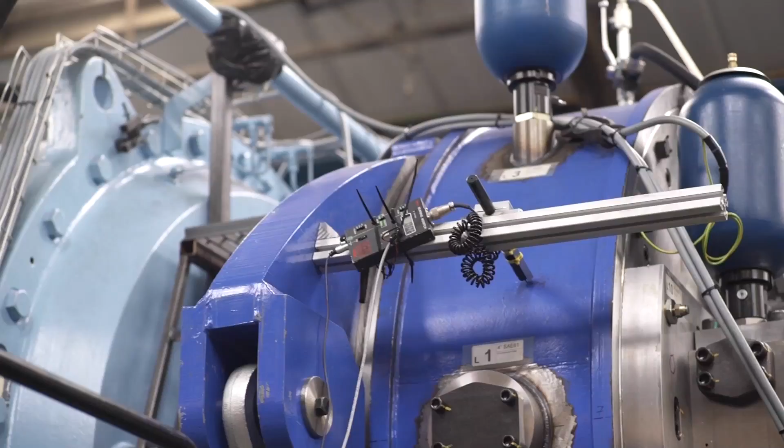Artemis Intelligent Power was a company we spun out of the University of Edinburgh in 1994. There were a lot of renewable energy projects on the go and no realistic way of matching the movements that natural forces bring to the movement that a generator making electricity requires. Digital displacement technology replaces the conventional analog mechanisms of hydraulic machines with a completely digital control method.

Each working chamber of the machine is provided with a solenoid-controlled valve, which is controlled by an embedded computer synchronized to the rotation of the shaft. Every working stroke of our machine is controlled in real time by a computer. Of course, this technology didn't exist.

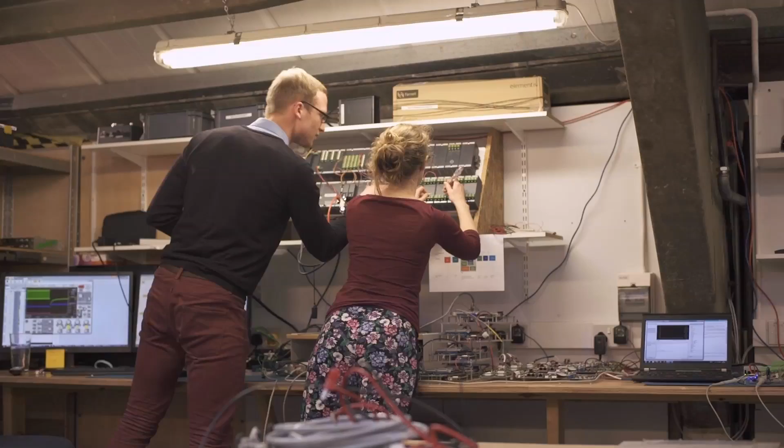It was really by making first small demonstrator machines and understanding what the technology can do that we realized how big the potential is. For the first wind applications, we wanted to do something big straight away, so we were looking at several megawatts right from the very beginning, using a ring cam pump, and choosing what fraction of the pumping modules you want to deliver the power.

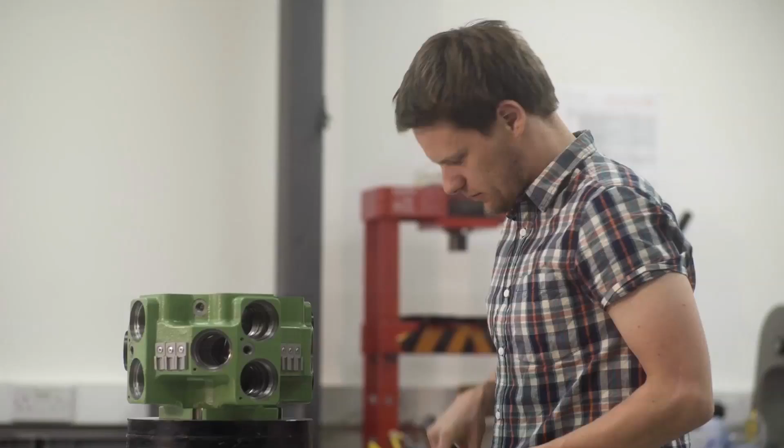So you've got variable speed input and absolutely fixed phase frequency output. One of the most impressive aspects of the technology is really the way it's designed. The 7 megawatt transmission is made of many modules of the same, say 100 kilowatt, and if anything happens to any of these modules, they can simply be disabled and everything else continues working.

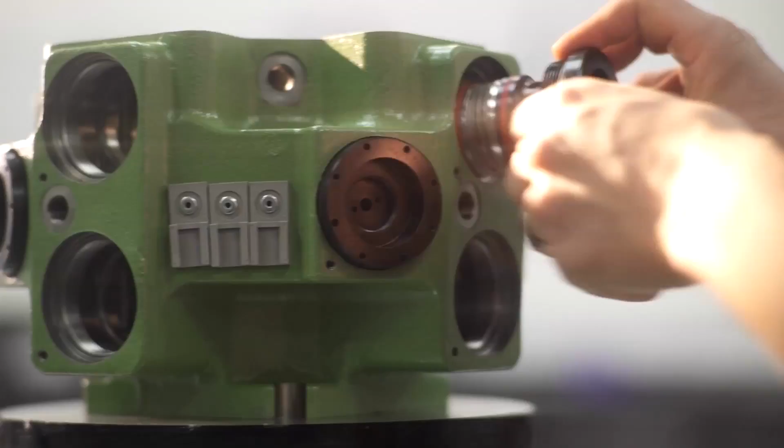I think the very exciting thing about digital displacement technology is that it can be applied to so many different markets, and apart from the environmental benefits from this technology, it brings employment. It's great in a way to see that it is possible in the UK to build a company that can develop but also manufacture and enter into world markets.

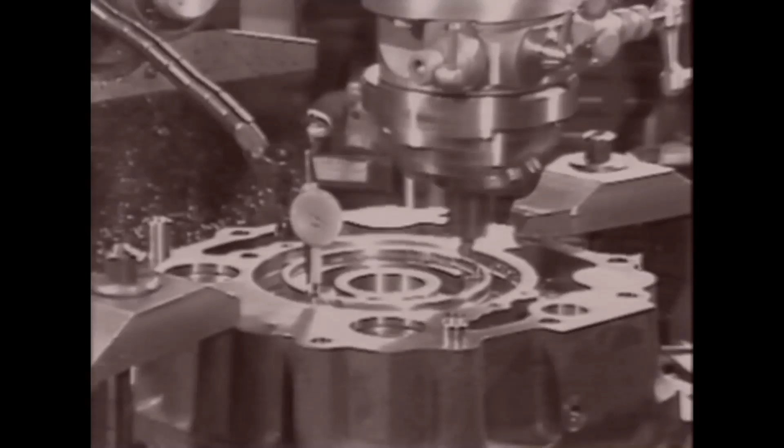In the mid-1980s, Matthew Ree and Karen Gibson worked with him to build and test a 500 kilowatt prototype. Robert was uncompromising in his pursuit of high efficiency at full and part load, and we knew that such an approach was essential if wave-generated electricity was ever to be economically produced.

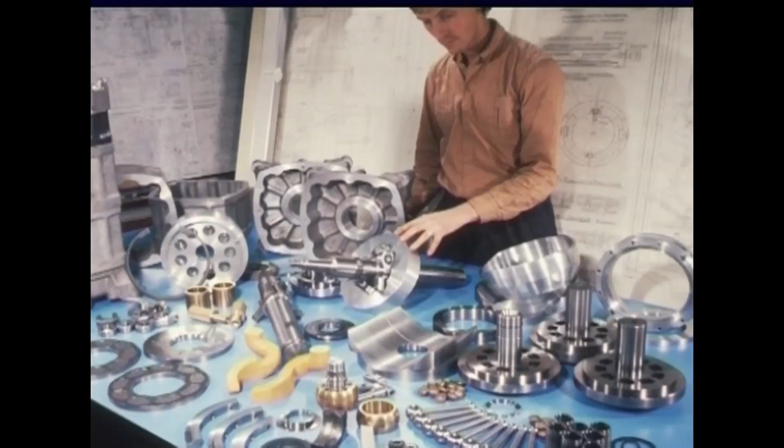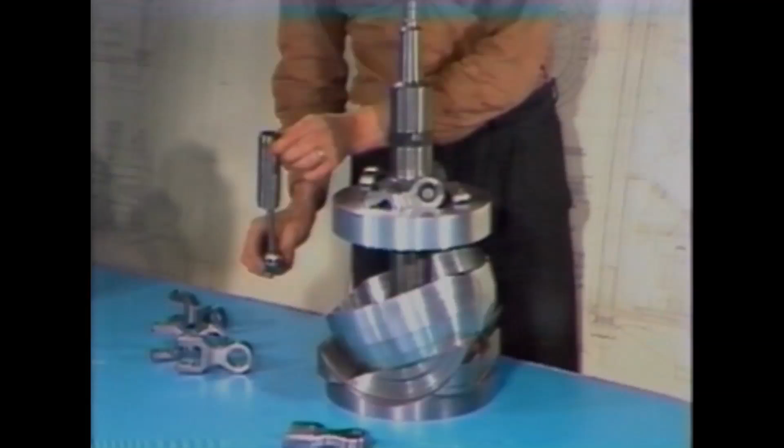The machine ran inside a dry case, and most of the bearings, including those of the swash plate, were hydrostatic. The outsides of the cylinder sleeves were pressurized to reduce piston leakage, and the tri-link connection eliminated slipper pads. The design incorporated hydraulic computing elements to optimize performance. Robert Clerk's brilliant synthesis of new ideas pushed the limits of conventional hydraulics.

Now that really was conventional hydraulics, which is what Robert brought to us. But the other half of that power transmission contained the seeds of digital displacement. And that will follow on, I think.

Should I just carry on? Yeah, carry on with that one, Stephen.

So basically, the low-speed part of what was involved with the duck was actually the precursor to digital displacement. We needed a way to have a very controllable transmission inside this wave power device. And Robert, although he came and helped us develop his own pump, which was incidentally about 4 times more power dense than the competing pumps at the time, he also gave us the background to start on this new pump.

And I was involved really from the very beginning, at the age of about 23. I'll be 60 in January. It's been a long, long time.

In any case, we started working on this new kind of hydraulics that we needed to develop in order to make hydraulics efficient enough. And so there's going to be a follow-on little bit of video now, which actually takes us through the early parts. And we're listening, by the way, to the voice of Jamie Taylor. Jamie was the first person I ever met in Edinburgh, and in a way belongs to the MacRobert Award as much as the other 5 people named. But we get his wonderful mellifluous Scottish accent taking us through this. So perhaps we can start that one.

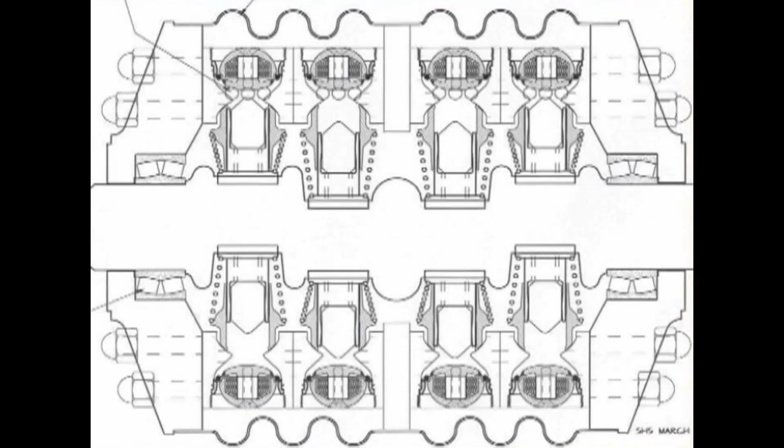To obtain the ultimate efficiency with a natural interface to electronic and computer control, Stephen Salter had already begun working with Robert, and now with Win Rampen, to develop a new technology, digital hydraulics. By using computer-triggered valves, individual cylinders of their new radial piston machine would be pressurized into circuit only when a work stroke was required. Individual units could be stacked on a common shaft to form the wedding cake machine, an energy processing system able to service many independent hydraulic circuits.

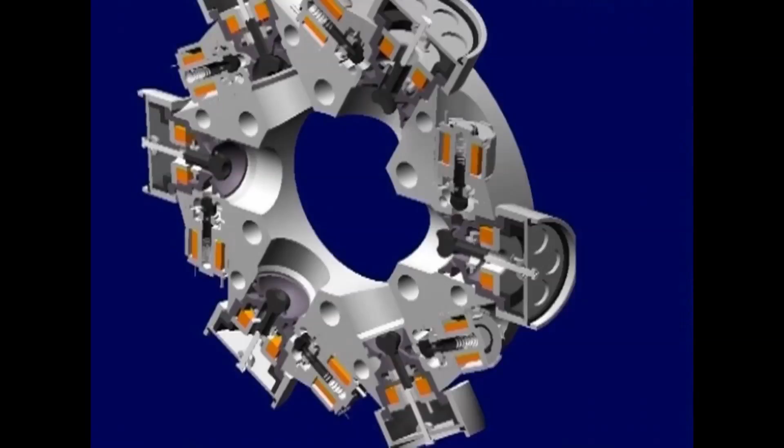The digital concept scaled easily to different sizes. The first machine was for a portable hydraulic power supply. The pump sits in the oil tank under the electric motor. Pressure and flow can be set by control knobs or by external command signals.

This was the first machine built by Artemis Intelligent Power, set up by Win Rampen to commercialize digital hydraulics. Artemis supplied prototypes of the pump to Sauer Danfoss, world leaders in mobile hydraulics, and they continue to be involved with the work. Digital hydraulics required the evolution of a new species of poppet valve, which would rapidly change state following a current pulse in a solenoid.

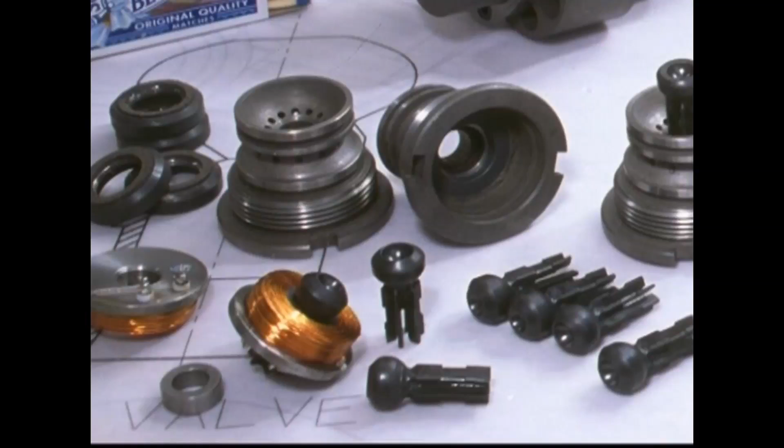We made these low-pressure poppets from a carbon-filled thermoplastic called PEEK, polyether ether ketone. We'd already tested these little sample poppets to see if PEEK was up to the job. The rotor of the test rig subjected each of them to 1 billion pressure cycles and confirmed that PEEK poppets would be dimensionally stable, fast and quiet in operation.

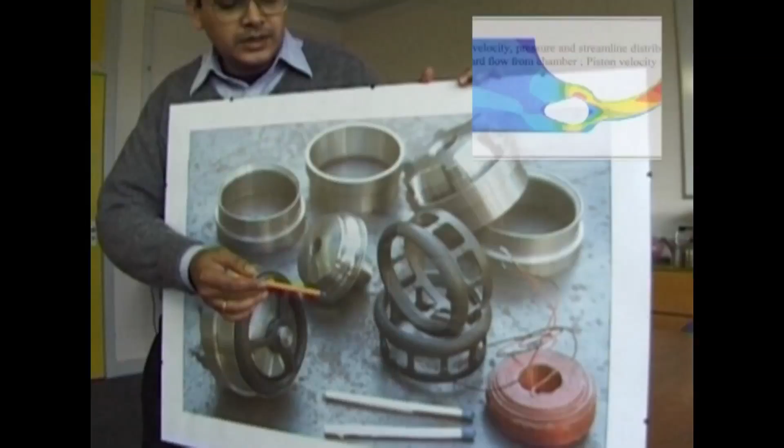When the test rig was running, our colleague Ehsan was refining the design of annular poppet valves using computational fluid dynamics. By providing an inner and an outer flow passage, annular poppets will greatly increase valve flow capacities. This will be particularly important for larger machines.

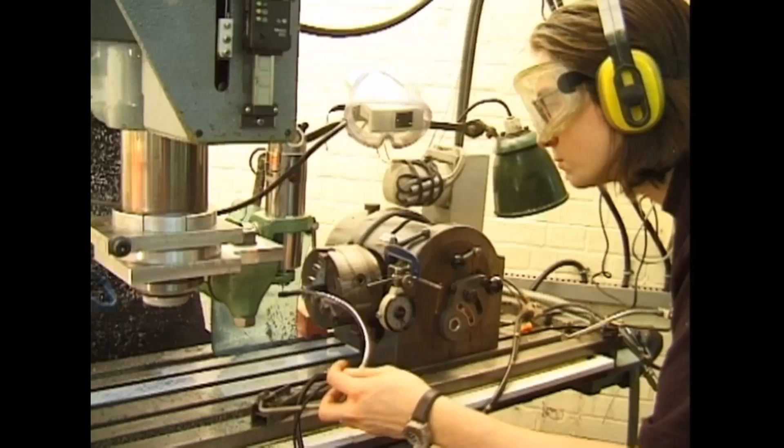Up until now, the digital hydraulic machine has operated as a pump. It is vital to extend its capability so that the same machine can also function as a motor. The first wheel motors will be fitted to a small vehicle, and the crucial test will be to generate zero-speed torque for startup.

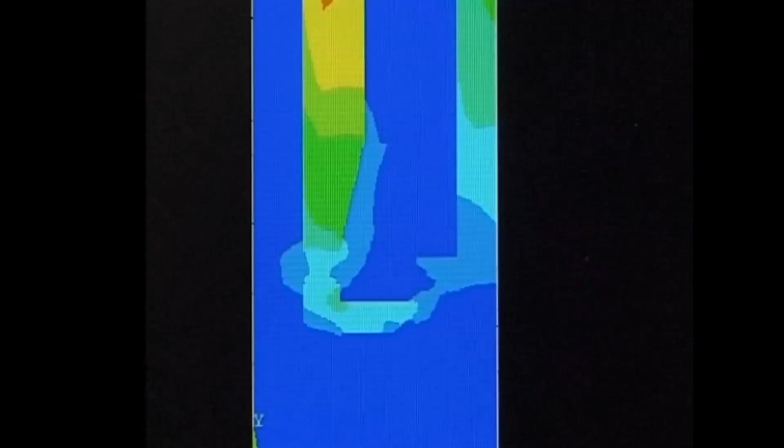Neil also spent some time redesigning the solenoid magnetic circuits using the ANSYS finite element package. The solenoids are energized by brief pulses of current at precise times when the oil forces across the poppets are near zero. Magnetic forces are generally much smaller than the working pressures of oil hydraulics, so to have authority over residual fluid pressures, the solenoids must be very well designed indeed. On the prototype wheel motor, the valves and the solenoids are in place.

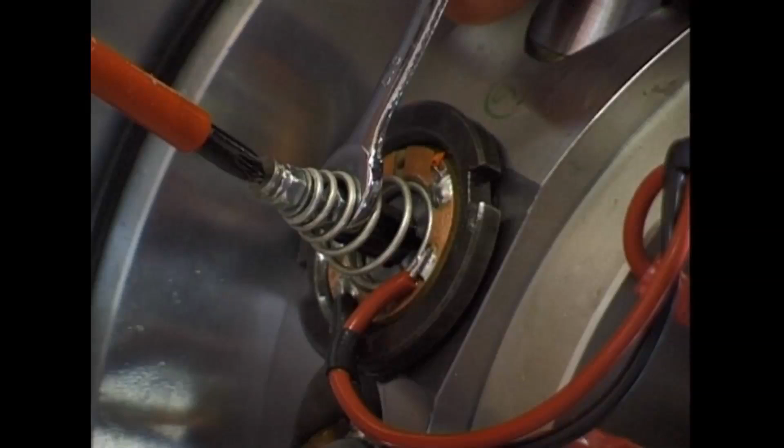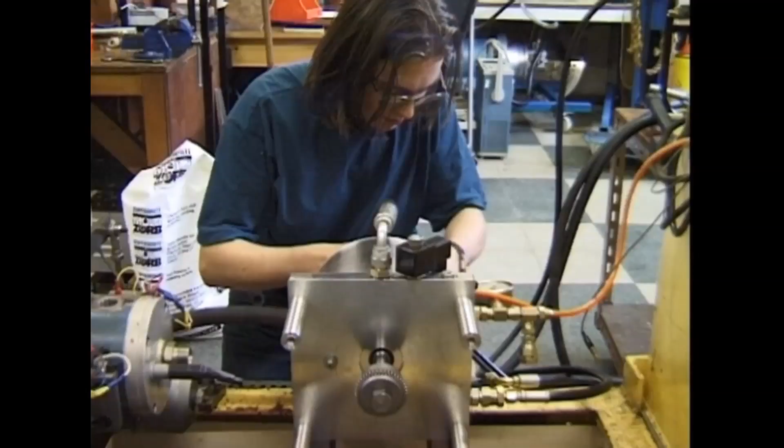The motor is enclosed in a cylindrical casing to completely immerse it in oil. There are a lot of variables to be optimised on its control card. The valve control algorithm and timings are particularly critical for motoring. Neil's using one of the original digital hydraulic power packs to drive the new motor, which is very handy for this kind of setup. Because there aren't any throttling valves, the oil and the machines stay cool.

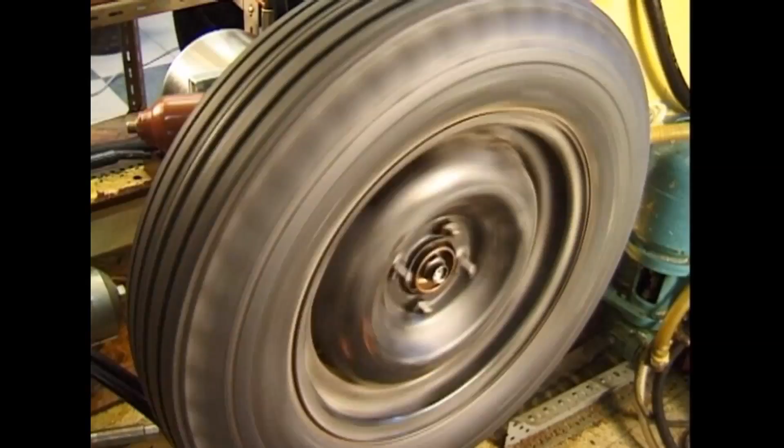The gentle chatter of poppet firing also provides a kind of intuitive diagnostic tool. To our ears, the sound is like a kind of pleasing hydraulic dialogue between machines.

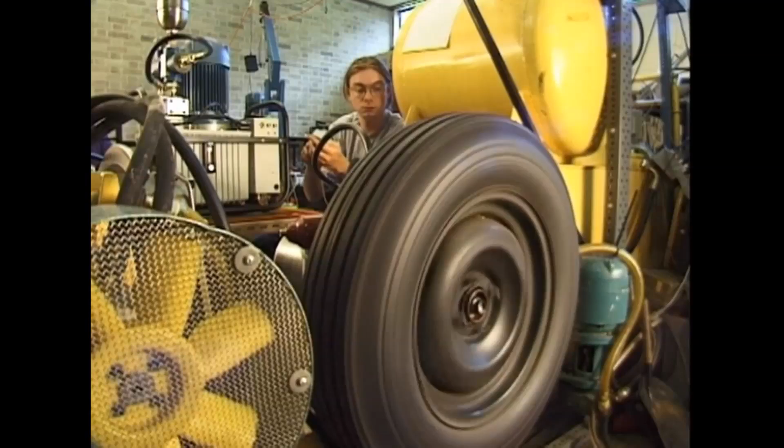The drive to develop intelligent hydraulics came from wave power research, but we now know that it will have a much wider impact. Okay, well, if we move on then, Win, what have hydrostatic drives been used for before, and how did the digital displacement that you developed differ from it? What made it better than a mechanical or a direct drive for a wind turbine?

I'm just going to say a few points about that previous video. Although it said in the voiceover it was sort of contemporaneous, it's actually quite old, which explains and excuses perhaps my hairstyles through the ages.

The other point to make, the environment you see there was the wave power workshop as then, and essentially this is where Artemis was bootstrapped. It was not a salubrious environment. It wasn't an incubation centre with coffee machines and bean bags and all the other accoutrements today. It was a pretty down and dirty basement, but it had a very good machining workshop.

It had three-phase power, and it had a ready supply of students coming through the door, keen to get some practical experience. It also had a lot of skips outside because the university at that point was throwing out all the equipment from their labs which were underused, because they thought in the future everyone would just be doing stuff on computers. So as they were throwing out equipment, we were raking through these skips, finding electric motors and encoders, all wonderful stuff. And so half of that stuff you see there was actually sort of built from scrap pieces.

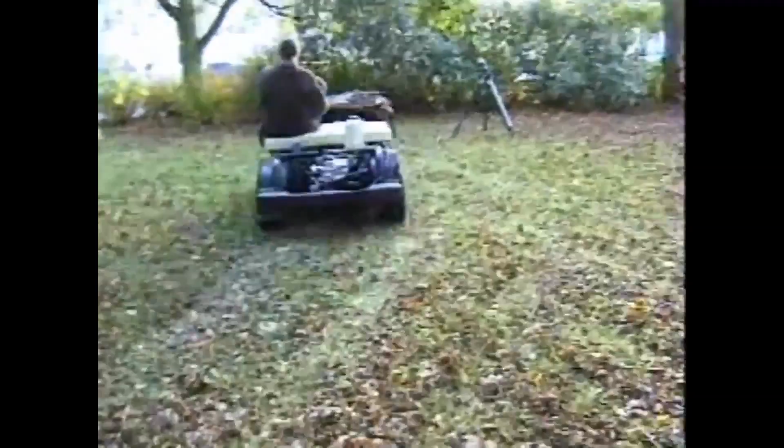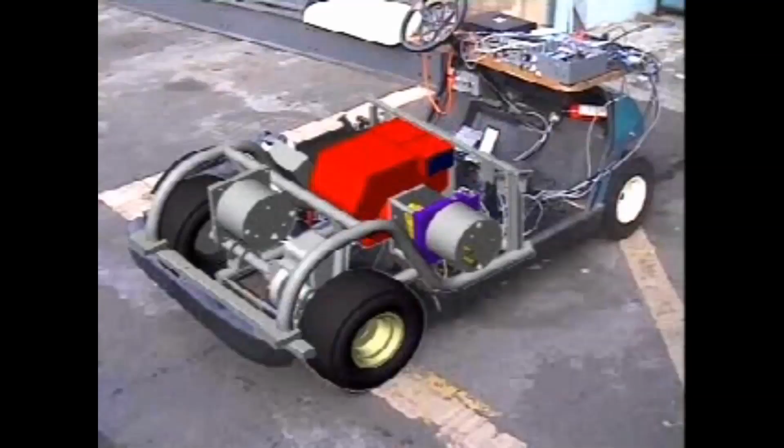Wind power was totally out of reach, but what was in reach at this scale of a few kilowatts was a vehicle. This was essentially what we'd call a mule vehicle - that machine you saw going round and round, we packaged into a vehicle. We have a pump on the engine and a motor driving the wheels, and on the tray at the front we've got essentially the electronic guts laid out so it was easy to probe and fix if something went wrong. It wasn't particularly well packaged, and certainly wasn't ready to demonstrate to CEOs of big companies. But it was a feasibility study, and it was a proof of concept.

We then refined that and simplified the system somewhat, and gave it a layer of computer control and a system controller, which allowed us to demonstrate some of the advantages for controllability. Here, for instance, I'm making the vehicle move gently - this is actually quite a challenge for hydrostatic transmissions, they often are a little bit jerky. So I had different modes of control. We could simulate electronically the drive behavior of the competition, so a conventional vehicle with a torque converter.

What I'm doing here is turning this wheel - this is a little electronic input which allows us to essentially wind the vehicle forwards and backwards. You can imagine if you're trying to get your car into your driveway, this could be quite useful, to be able to wind it forwards and backwards and position it. But you can also have serious applications, such as trying to position a forklift.

That culminated in a demonstration. That's the chief executive of Sauer-Danfoss, who got a ride on the golf buggy. By this time it had been cleaned up and I'd had a haircut, you notice. That demonstration was one of the pivotal points in the Artemis story, because it gave a key strategic investor the confidence to fund us through the next stage of development.

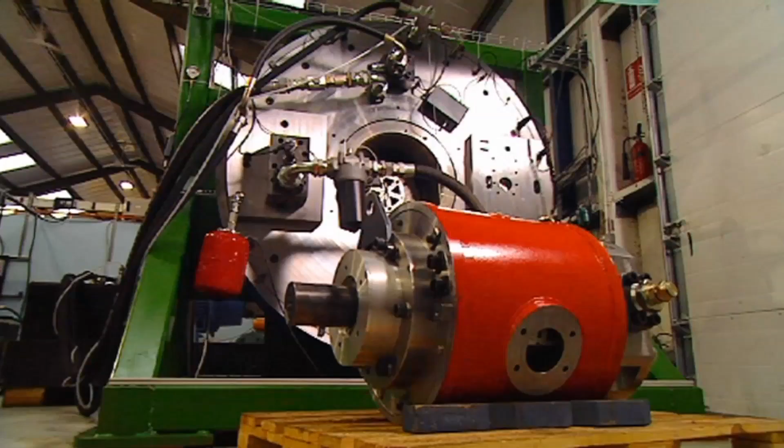At the moment, nobody wants to use hydraulics in wind turbines for the transmission because they would produce a lot less electricity per year. But by being able to match the efficiency of the mechanical gearbox, we can install hydraulics into the drivetrain. So we get all the benefits from the hydraulics, which are robustness, low weight, and low cost, without the disadvantage of the low efficiency traditionally associated with hydraulic transmissions. It gives us a much better performance because in the nature of a hydraulic or hydrostatic transmission we use the word decouple - it separates the two problems. The first problem is how you capture the most energy from the rotor as it turns. The second problem is how you turn the electrical generator at a higher speed and in the smoothest way, so you get the cleanest electricity coming out of it.

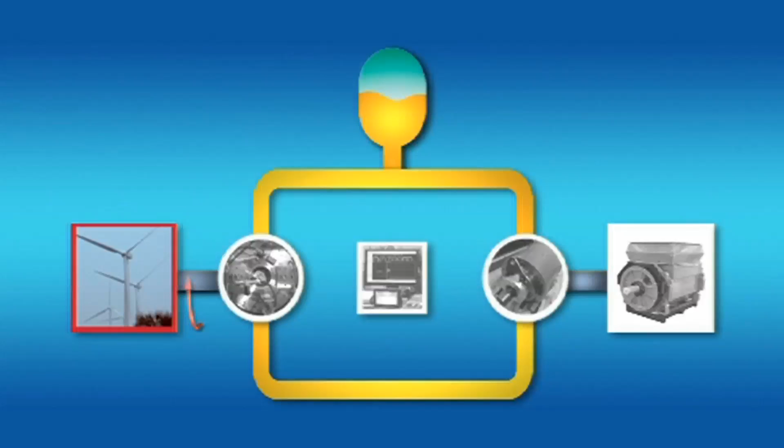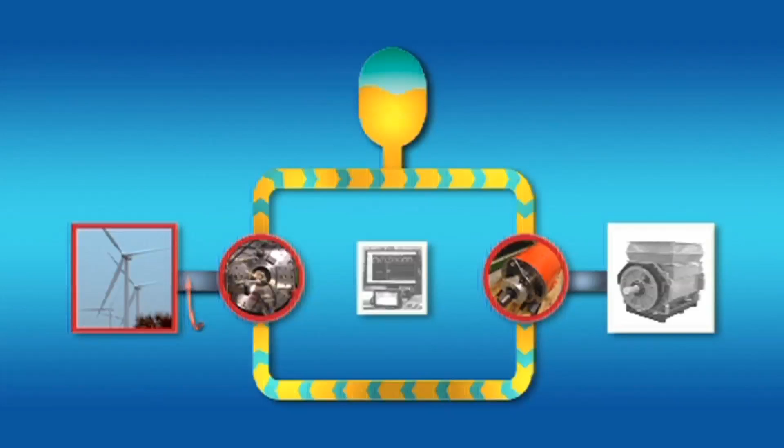The wind drives the propeller, producing torque at its shaft. This drives a pump instead of a gearbox, produces fluid power, pressure and flow in a hydraulic circuit, which in turn drives a hydraulic motor whose displacement is smaller than the pump, so is able to drive the generator at a constant high speed. The whole system is continuously controlled and monitored by a computer.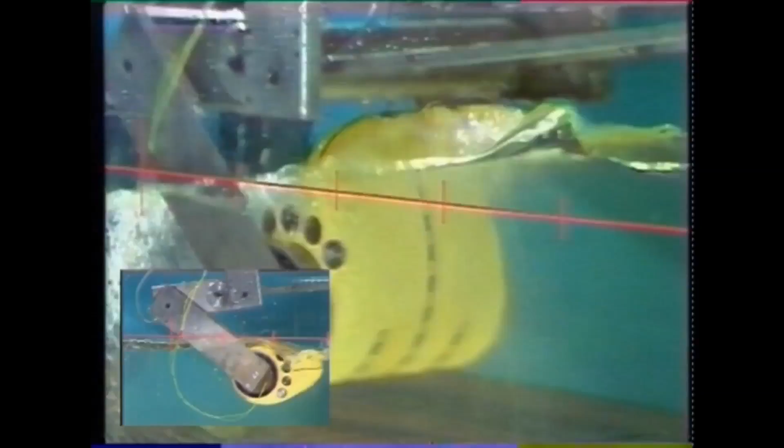Its roots came from work that we did in wave energy, starting probably in the late 70s, when we needed to find a way of conveying the energy from ocean waves - which are slow, irregular, and have very high force - to the regular rotation of an electrical generator. And that, in fact, is very much parallel to what we're doing with the wind turbine.

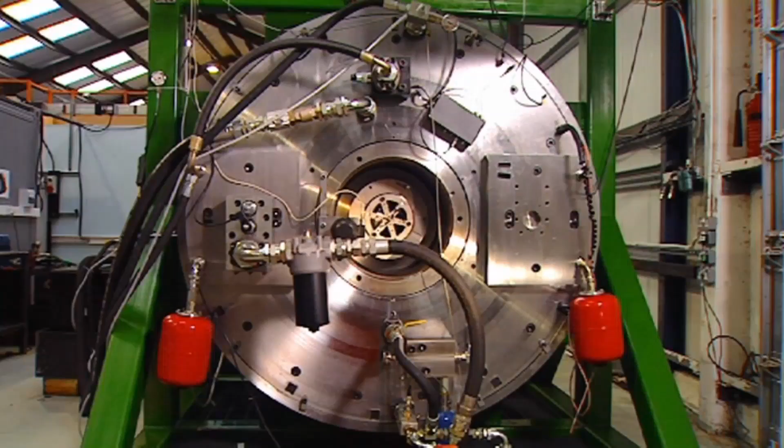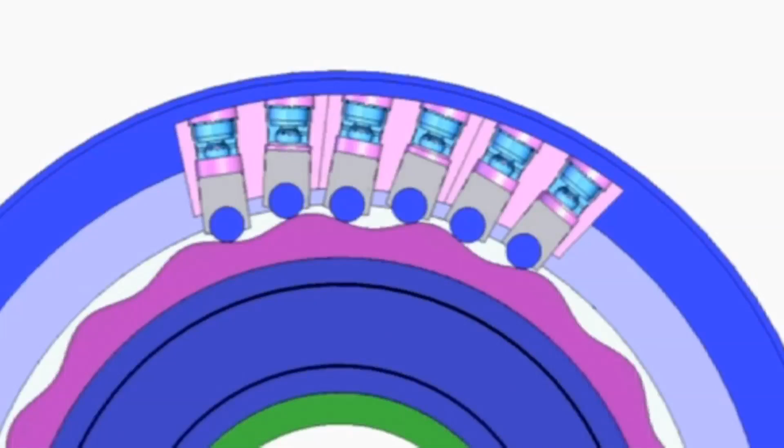What you have to imagine is that inside this machine, there are many cylinders with pistons moving in them. As the shaft goes around, we call it a ring cam because there's actually a cam inside there. So each time the shaft goes around, each of those 68 cylinders does a pumping stroke. With digital displacement, we can decide just when the pumping stroke is about to start - we can say, well, do we actually want this to pump, or is it needed?

Maybe we're working way down at part load, at 10% of the full rating. If that's the case, the computer will automatically disable that cylinder by controlling the valve at just the right moment, returning the flow of oil back to the low pressure reservoir. We call that idling. That's a key part of it, because a cylinder that's idling has very low losses indeed, and that's a major contribution to the much higher part load efficiency.

We're releasing the part of the machine that you aren't needing at any one time, in a way that's not costing you much in terms of ongoing power consumption, whereas conventional hydraulics are spectacularly poor on that front, which is one reason they haven't taken over all the different applications they could have otherwise done.

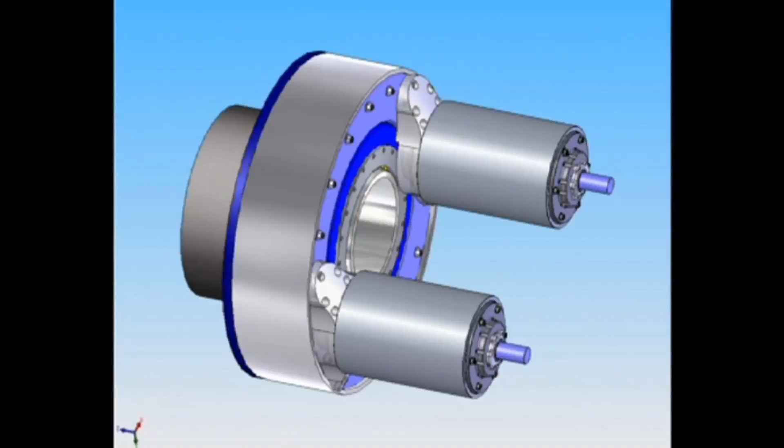This is a very large hydraulic motor, digital displacement. The idea is to have one of these pumps driven by the wind turbine rotor and driving two of these. Maybe the wind speed is only 6 or 7 meters per second, which is quite low for a wind turbine. We can turn one of these off, so we only have one generator, and that immediately reduces the losses even further.

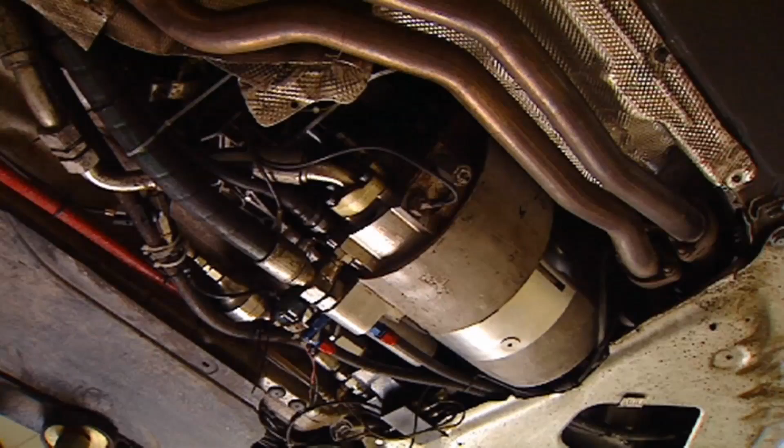It could, in principle, be applied at any area where you want to transmit shaft power. So we see there are many applications beyond the wind turbine. These include harnessing wave power, and Artemis has developed a car where the gearbox has been replaced with a hydraulic pump, which, via pipes, drives two independent hydraulic motors. It's shown around 50% savings in some circumstances.

With this Carbon Trust funded program, we've been able to go from a paper study, which people believed, industry being able to believe in but couldn't really pick up from, to a real hardware demonstrator. This has really shown the benefit of the investment and the grant from the Carbon Trust, to be able to actually build a massive physical asset to demonstrate the technology to set you on the road.

So given that you got to the 1.6 megawatt turbine, MHI were obviously seriously interested in what you guys were up to. So I think, Neil, you're going to take over the story from there, are you?

Yeah, so we were looking for a strategic investor, and at that point Mitsubishi Heavy Industries was also trying to work out what to do next for their journey in wind power. They were looking for a technology which was scalable, which also played to their strengths, and which gave them a unique position in the market.

In order to get to that point, we had to make a demonstration to them, and that Carbon Trust funding really set us on that trajectory.

Once the acquisition was complete, we were set another challenge by Mitsubishi. It wasn't simply that they acquired the company and said, 'That's great, I'm going to immediately adopt it for the next generation of our wind turbines.' No, there were internal proofs that we had to make, and really around that - if we move on to the next video, we can have a look at the so-called Windrig 1. This was at the scale of 1.6 megawatt.

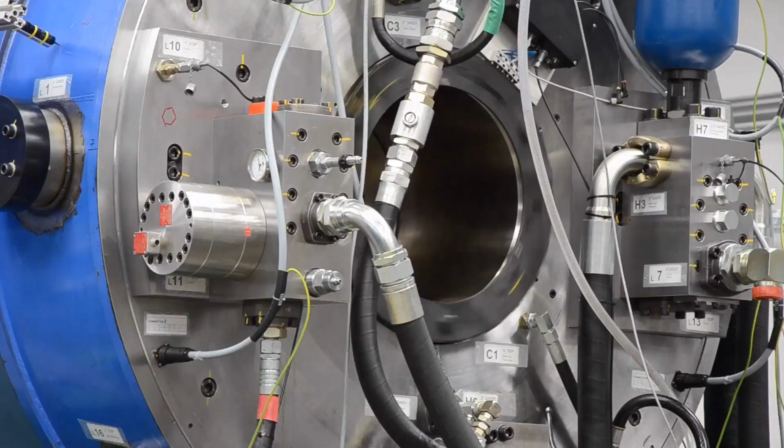After the acquisition by Mitsubishi, we built this into a complete system demonstrator. This was to show the efficiency, the controllability, the reliability at a scale which made sense, and which could convince them to take the next level to scale it up yet further.

You see some of the machines that we built in-house, and of course we're building the machines, we're building the electronics, we're also building the systems to test them. You can see the importance of the craft skills at the heart of it - like any machine, they can fail because of the smallest detail, the smallest quality issues. So it really is so important to getting to this point.

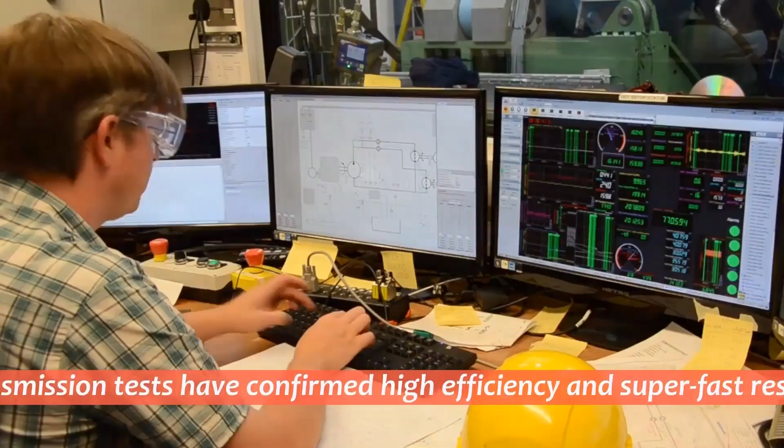This test rig was quite a scary thing to operate, and there was a lot of pressure on it. We had teams of Mitsubishi engineers watching what we were doing, because of course they were going to make some very important decisions based on these test results. So this was another important milestone in our evolution towards the 7 megawatt goal.

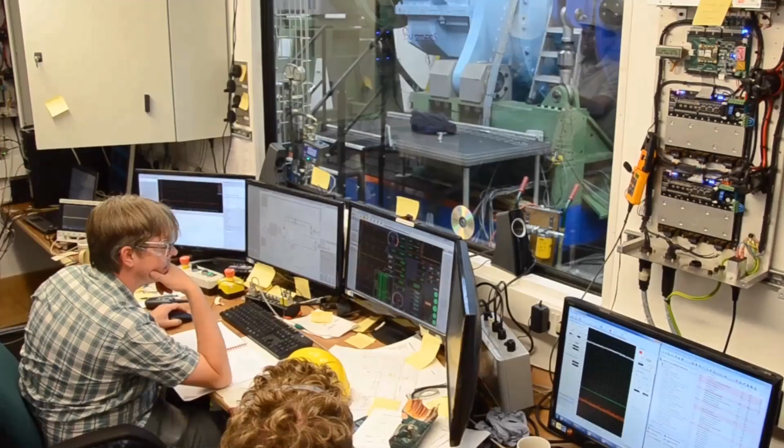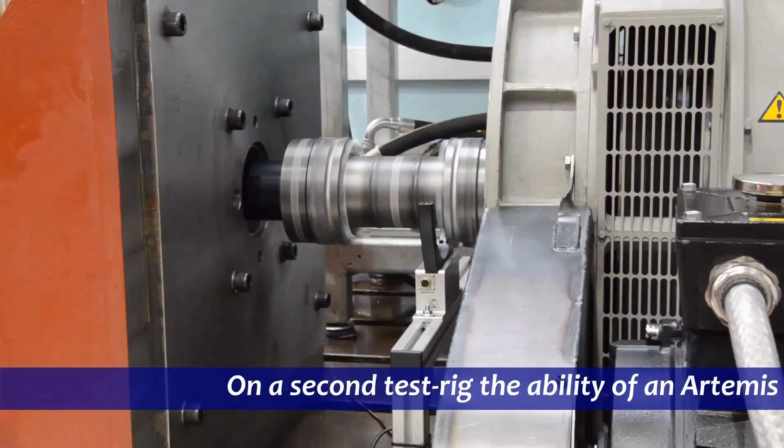You can see on the wall there the electronics firing the valves. Each one of these little pulses represents one valve firing decision by the controller, and that's the hydraulic dialogue between the pump and the motor going on here in the controllers. What we're doing next is demonstrating the other side of the transmission, which is connecting to the electricity network through a synchronous generator.

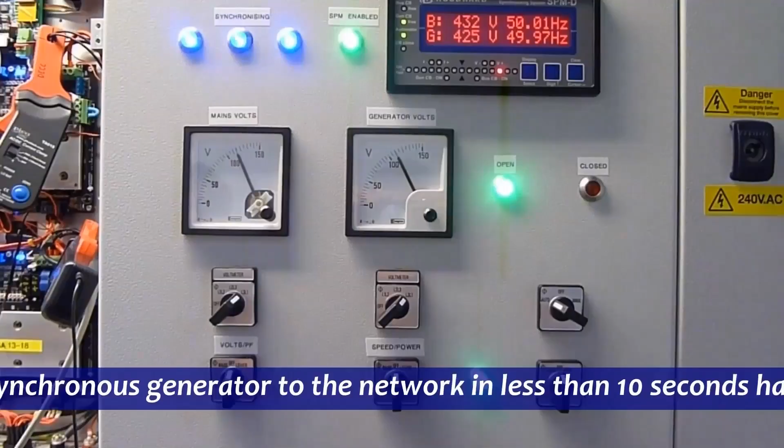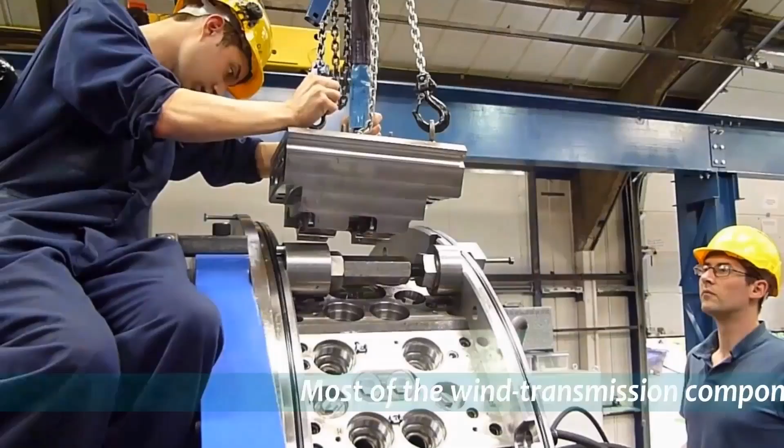It was very important to get the speed of the generator up and achieve synchronization as quickly as possible. Here we're accelerating and bringing the voltage into synchronicity in about 10 seconds, much faster than any conventional technology could do. That piece of work was done by a summer student who went on to win an award as Student of the Year and get his name on the patent. It's the type of experience students can have when they hit a really fast-moving development. You can also see some of the modules being replaced, showing some of those benefits too.

So we could maybe move on now to show the next piece of video, which shows what we did with Mitsubishi.

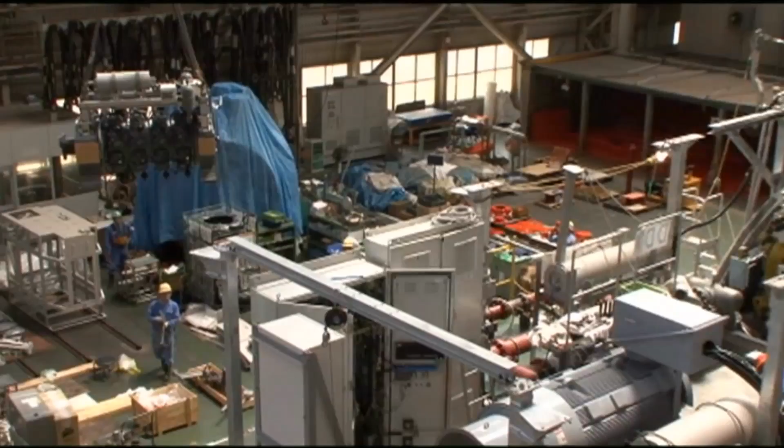Once the 1.6 megawatt had been demonstrated, we then had to scale it up to put it into a working wind turbine, because there were still risks around what happens when you actually connect it to the wind turbine, and how that whole system behaves in all the different operating conditions a wind turbine has to handle. So you can see here the scale is moving up.

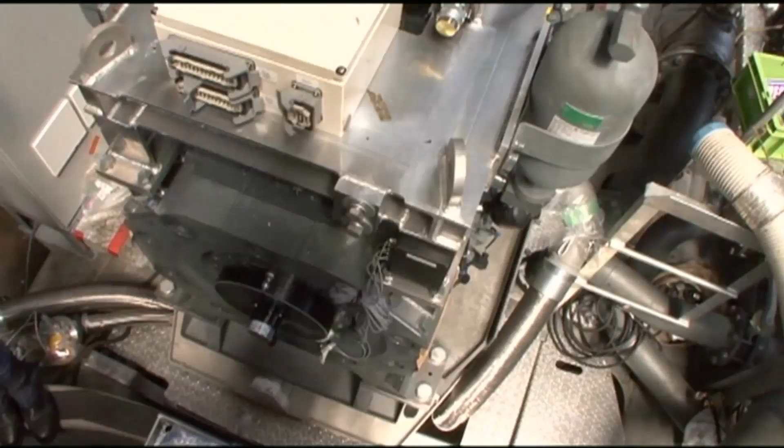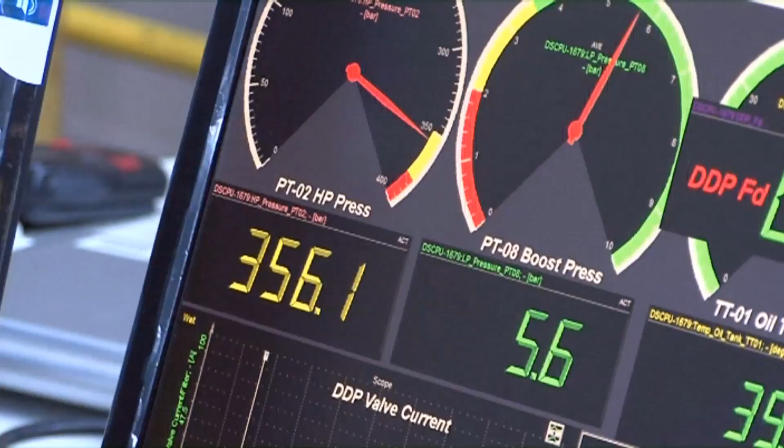It certainly wasn't a manageable scale for Artemis. There was no way we could have handled this type of project, whereas this is exactly what Mitsubishi is so good at in this type of heavy engineering. So this type of testing was still working at the prototype level. These were still one-off machines, but by now, one-off machines with a huge value.

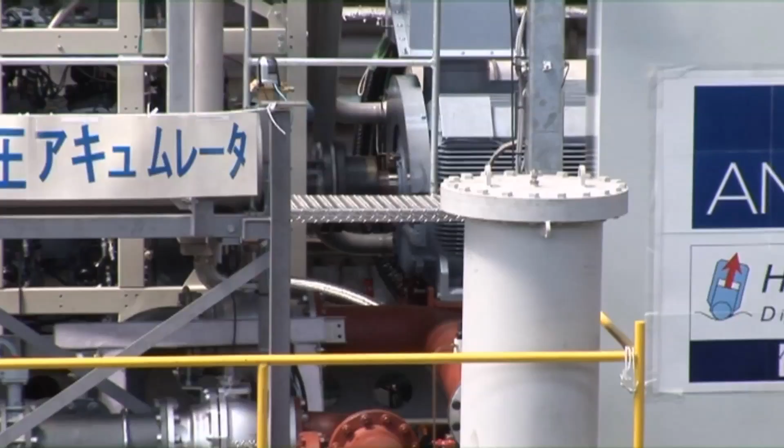As the money increases, so does the stress, or another way of putting it, the excitement. The atmosphere in these control rooms was sometimes pretty tense. It felt a bit like a rocket launch sometimes when we were gearing up to do the next power level up. I will always remember that experience, that's for sure.

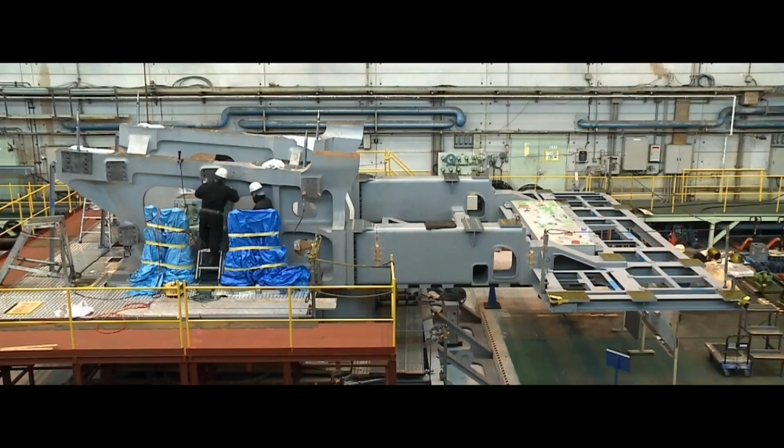So we can carry on our story and scaling up. Once we'd done the wind turbine at 2.4 scale, which was a resounding success, Mitsubishi committed to designing a 7 megawatt system, which we did as a cooperation.

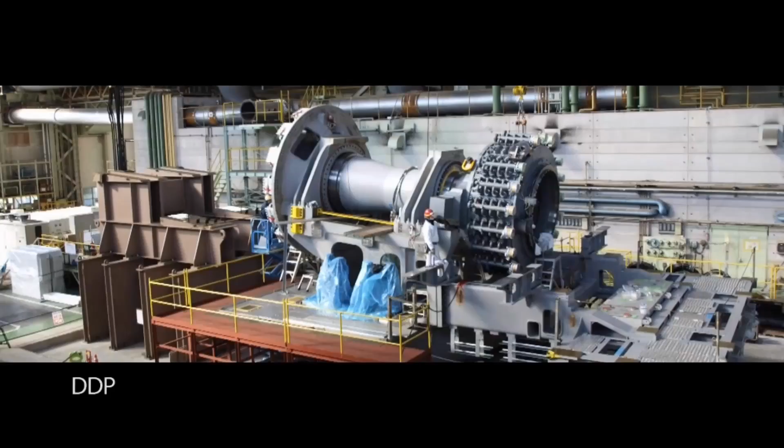But once it came to actually building the hardware, this capability is just incredible. Just the size of the cranes needed to move this stuff about, these cranes are actually quite thin on the ground. The ability to have an integrated system with this weight of equipment assembled by a team of literally, at some points, hundreds, was quite awe-inspiring to behold.

I remember turning up to help commission the system and just looking up at it, realizing it was the size of a 3-story house, and it contained equipment that we had only dreamed of a few years ago.

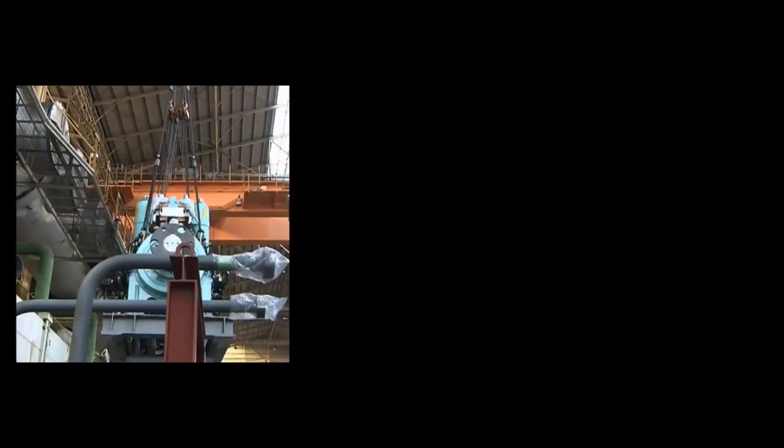So this is the digital motor being craned into position in the 7 megawatt, and you can see a view from the front of the pump and the shaft.

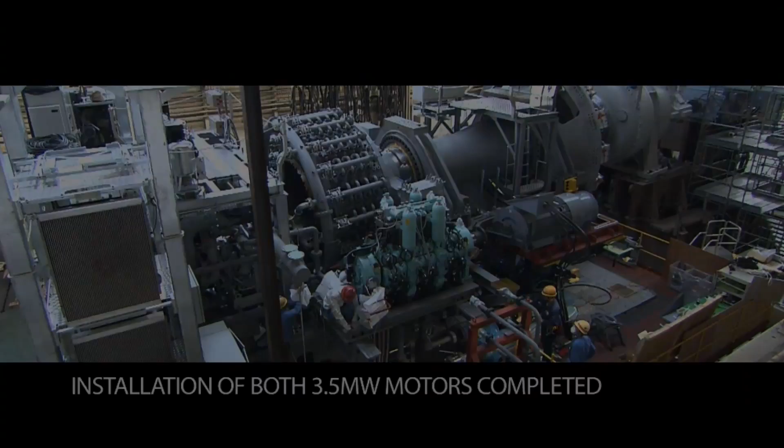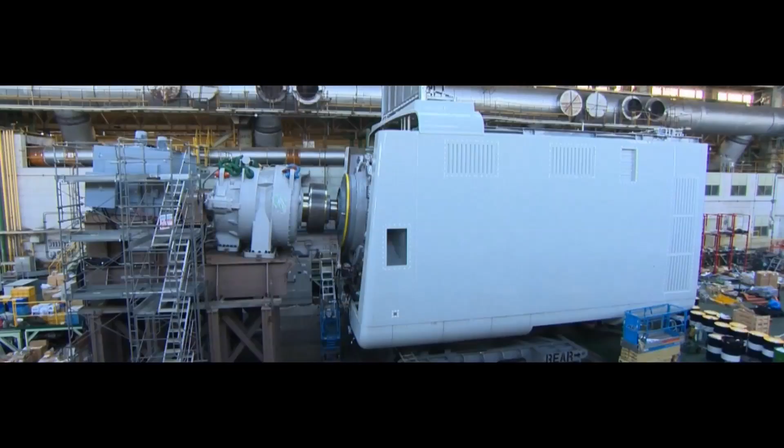And then, of course, it wasn't just a prototype transmission. It was a complete wind turbine that involved the hub, the nacelle, the tower, and the blades, all of which had to be developed by Mitsubishi as well. So it's a much bigger project even than the new transmission.

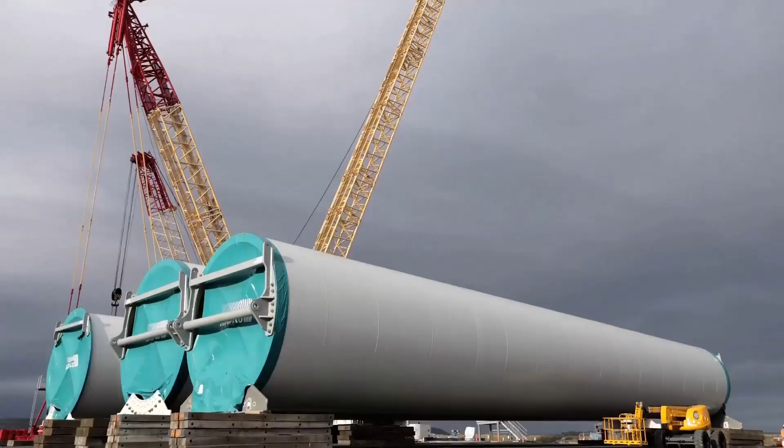We're going to carry on the story now to getting up to date and see how that nacelle, the main working part, was actually turned into a working wind turbine at Hunterston, on the west coast of Scotland. This is a facility operated by SSE, and this build was actually groundbreaking in many ways. Just the crane operations broke UK records for the weight and height of the equipment lifted.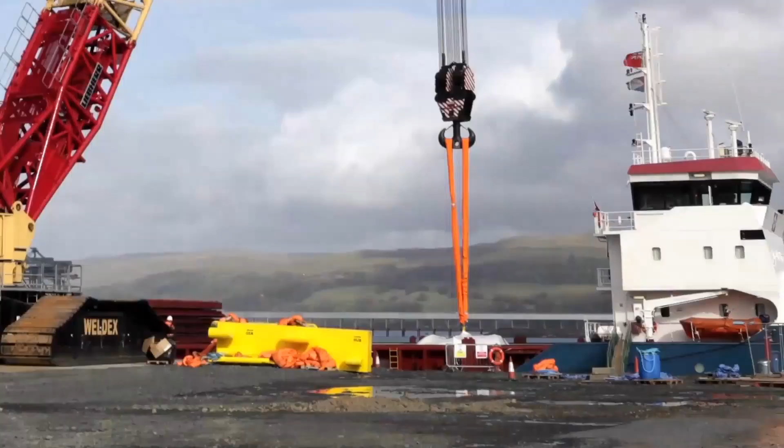You can see some of the logistics involved. These parts had to be taken over on a barge, and one of my favorite parts of this is when the weight comes off, you can see the boat lifting up.

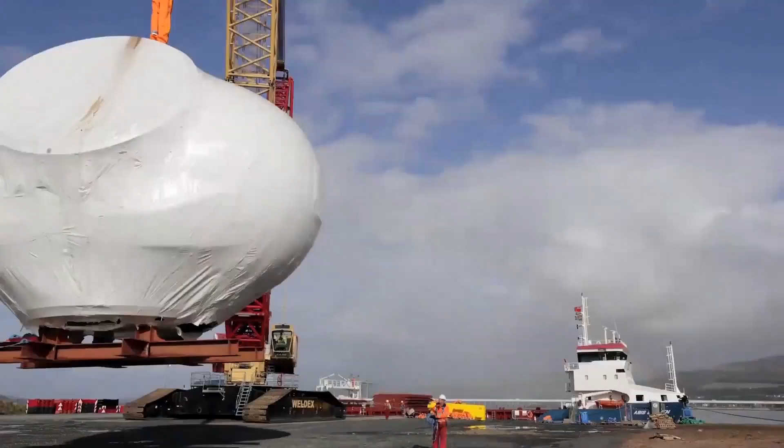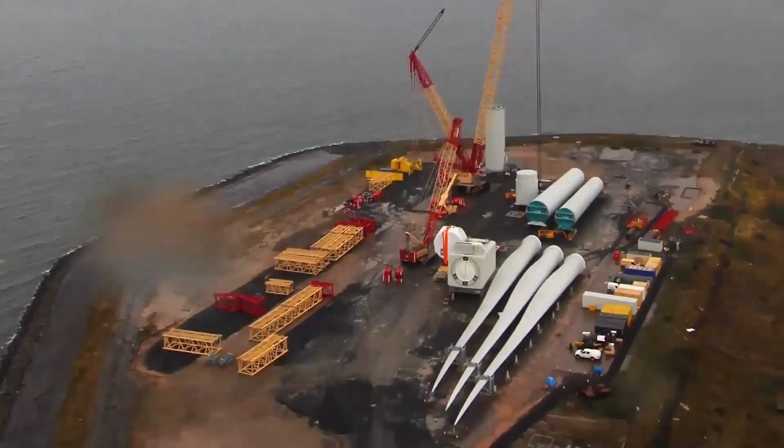This type of coordinated ballet - at Artemis, we were just watching this from the sidelines. We had a video monitor in our office and could see it from Edinburgh, and we were just watching in awe as this ballet of assembly took place in front of our eyes, with this beautiful backdrop of the west coast of Scotland as well.

It's easy to lose track of the scale, but when you see the size of the people, let alone the aerial work platforms that are scurrying about, you can get an impression. The overall diameter of the turbine is 167 meters.

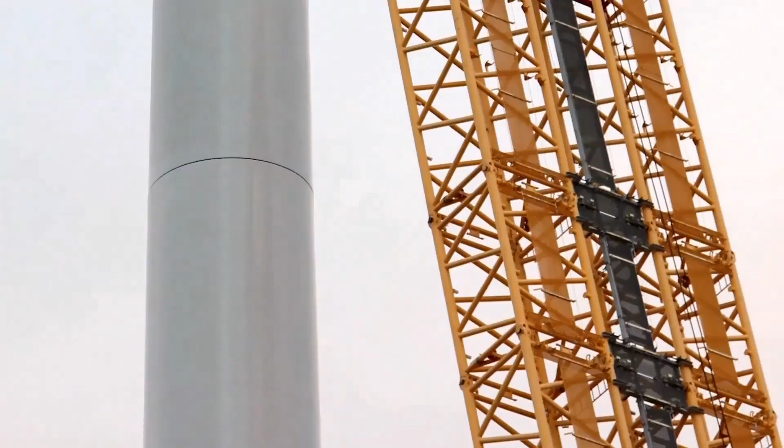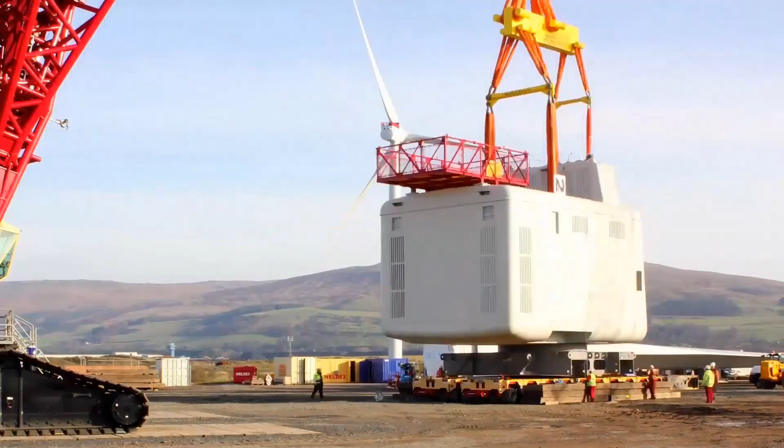That's a rival turbine behind it, by the way. It's only 6 megawatts. It's smaller.

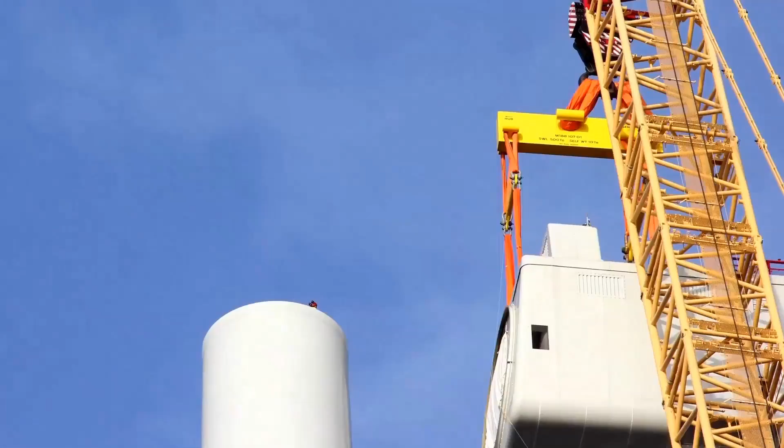So this was essentially the record-breaking lift that led to finally getting its nacelle put on top of the tower. Of course, the wind turbine assembly is such a complex operation. Everything has to be planned down to the last minute, and it's really an area where we had to step back for obvious health and safety issues. Everything had to be planned down to the last element. And you have the blades going on - they're using something called the blade dragon, a special clamp to position the blades at just the right angle.

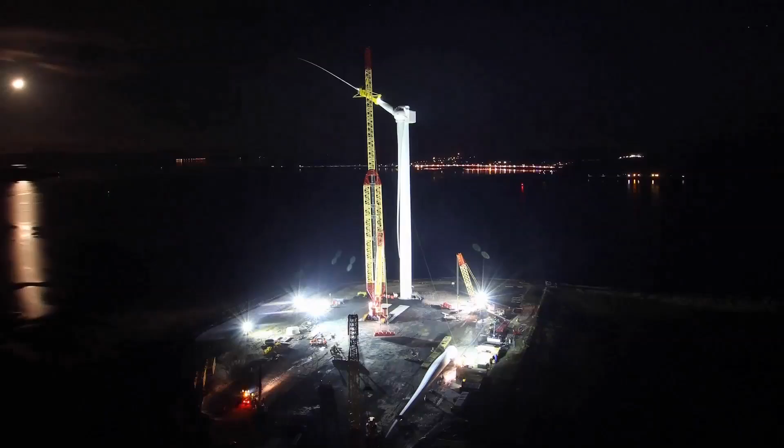You can see this video has been speeded up somewhat.

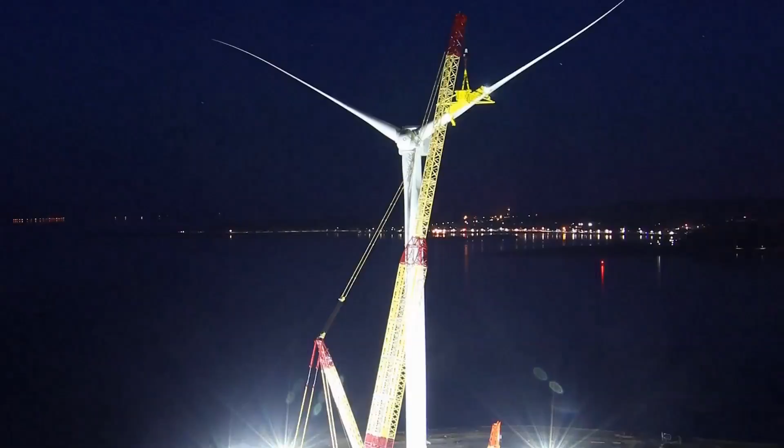And all done within a weather window, presumably. All done within a weather window - that's a very good point. Our Japanese colleagues can be somewhat superstitious about that, and one of them is convinced that he is the stormy guy, because whenever he turns up, it gets stormy. So he's got that reputation.

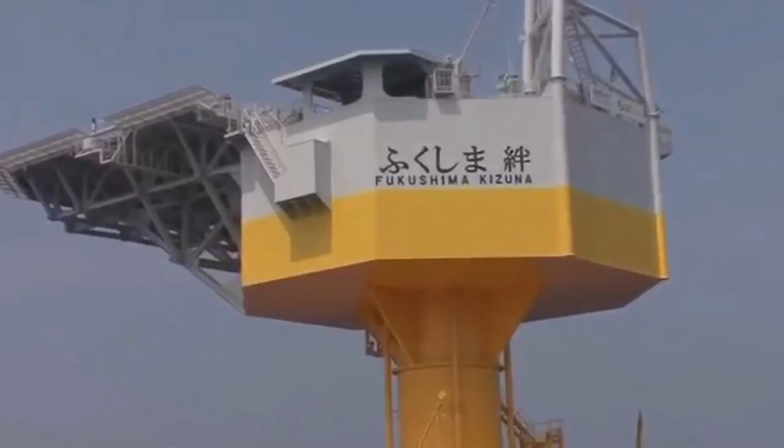So finally, it's been assembled and it's been commissioned and it's working well. It's doing exactly what it was expected to do. And it's led to the next stage, which is the world's largest floating offshore wind turbine. This is positioned in the Pacific off Fukushima, and has now been commissioned. It's working, it's just about to be connected to the grid, and really is a hugely high-profile project within Japan, and is a symbol of Japan's step towards renewable energy.

So tremendous success story, Neil, which you must be very proud of. But you employ 50 plus people, and at the time of the acquisition, many of them would have had shares in Artemis, because that's the way you ran it. Since the company's still there and you're still here, you clearly didn't all clear off to the beach in the Caribbean. But what difference did it make to them, and what difference has Mitsubishi's ownership meant to you as a company?

I think maybe Win should talk about the shares, because it was really one of his ideas. At the beginning, we decided that we couldn't pay massive salaries to our young employees. We thought to attract people of quality like Neil and all the other people that came aboard, we would have to think of something else, and so we thought giving people some ownership in the company would be appropriate. And as it turned out, that was a very good thing to do - even a very small share ownership really motivated people to take part in the company and take ownership of problems as they arose, and really helped us all row in the same direction when things got tough. I think that would be certainly my advice to anybody starting a small company, that they should think of doing the same thing.

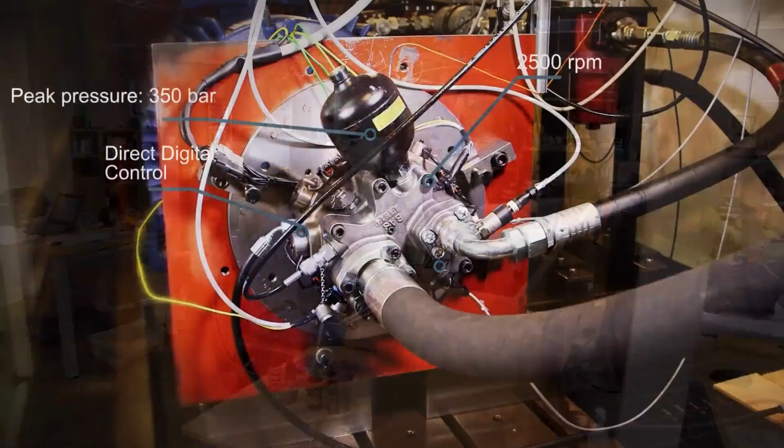Digital displacement technology is a new type of hydraulic machine. We have combined the very robust aspects of hydraulic machines with modern control technology. Each piston is individually controlled with a solenoid-operated valve, which is controlled by the microprocessor. This allows us not only to get very fast response and accurate control over the machine, but also to achieve very good efficiencies.

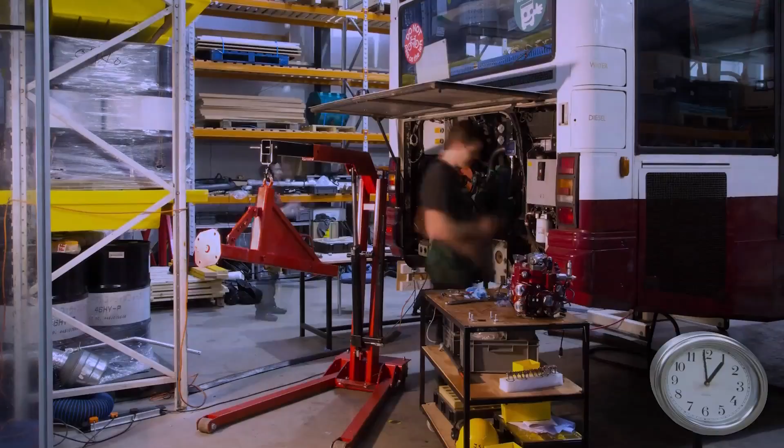We're developing it as both an OEM and a retrofit project. Throughout the project, we were considering the ease of installation as quite a high priority. So it's very straightforward to install and doesn't require a huge amount of skill in terms of the operator.

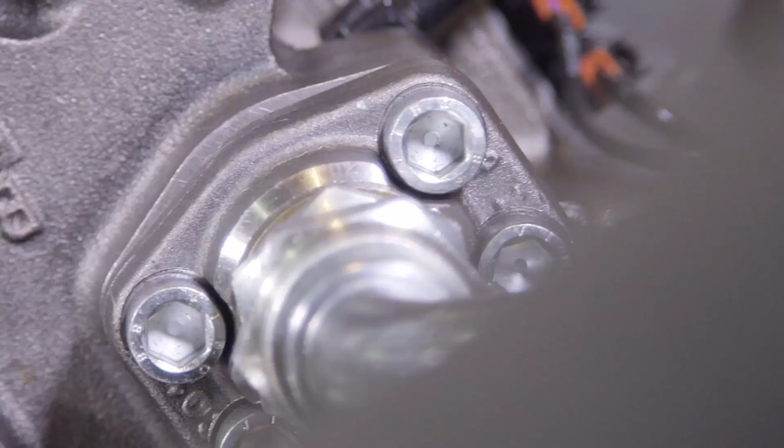So for any hybrid technology to be adopted by the main market, it's very important that we can create payback on the fuel saving on its own. This system has the potential to save around 20% of the fuel. And because of the very low cost that's possible for the system, we can achieve payback times that are well within the periods operators would expect, typically 2 to 4 years.

No, that's great. So, hopefully we'll have given you a bit of a taste there for the things that are still in the pipeline for Artemis to continue to grow success.

Before coming back into the audience, I've just got something I want to explore with you about skills base and the STEM initiatives, the way to encourage young people into engineering. Of course, the Academy's got a number of programs where it's trying very hard on a national basis to up the image of engineering, completely change public perception, following its Universe of Engineering report, and also to work with other professional institutions in doing things. What's your experience in Edinburgh and elsewhere about the attraction of engineering and the sort of work that you do to the young people you come across?